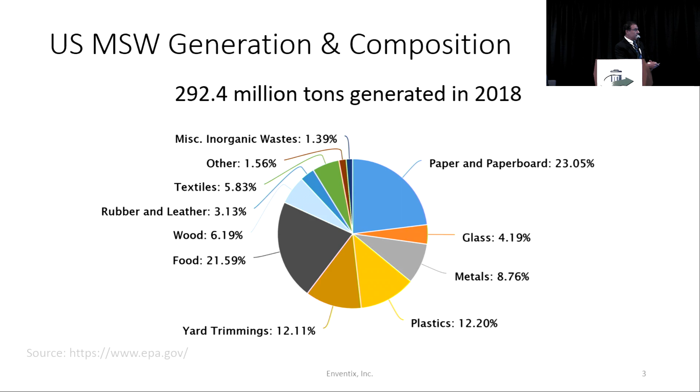In terms of paper, anyone who deals with paper recycling knows that a lot of paper is not recyclable. Dirty pizza boxes are not recyclable, all of the packaging material is not recyclable. You can't just send it to a paper plant and recycle it. So what do we do with it? And a lot of it is commingled. So how much do we send to the landfill? We send a pretty significant amount, about 50% or so, with all of the recycling, all of the organics, all of the waste-to-energy and everything - a significant amount of value is lost.

Also a significant amount of greenhouse gas emissions comes from landfill.

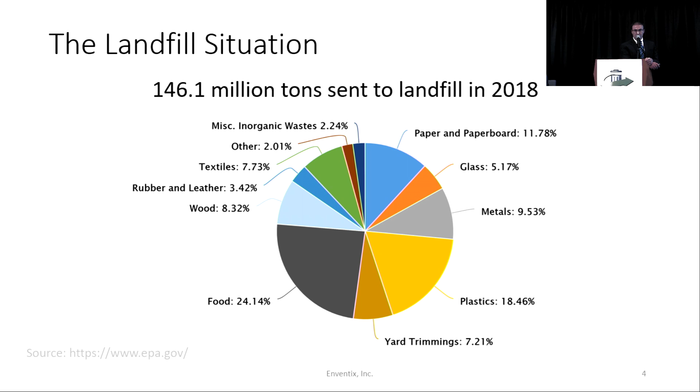Waste is not something that decreases, it increases with population, we know that. It doesn't matter what you do. So what is the solution? Landfill is business as usual in many countries, not just in the United States. Anything different requires capital investment, which in many places there's no incentive to make. Waste management companies don't like to change this type of business because, in their perspective, it doesn't always work.

We have some proliferation of MRFs, not only here in the United States, but throughout the world. There's some adoption of MRFs. But remember, dirty MRFs or single stream deal with mixed waste, municipal solid waste. It comes from a bag and has everything in it. It doesn't matter where you are—with some exceptions, maybe you can change people's habits to get them to put recyclables in the blue box, but you're always going to have to deal with the mixed bag that has everything in it.

So in order to solve that problem, we really have to use technologies which are in development, and many of the big components are already here, that will allow us to sense, segregate, and separate effectively. So we need effective separation and materials recovery.

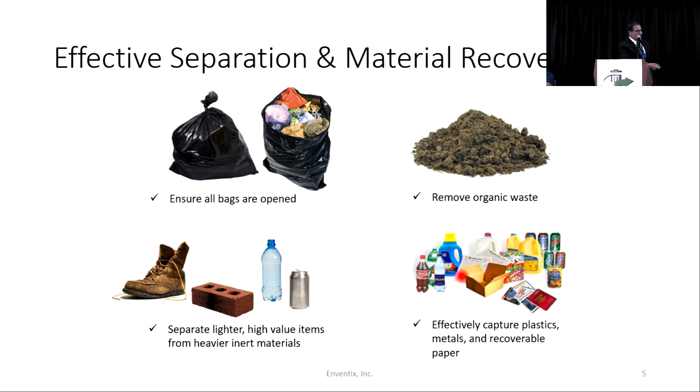All of the requirements here: we have to remove the organics, the food that comes in the bag, all of that material, and also the shoe and the brick and everything. We have to be able to do that effectively, and we have to be able to recover all of the valuable recyclables effectively and separate them.

The concept we're talking about is mostly familiar to everybody. The MRF, material recovery facility, which may be a dirty MRF or single stream, can accept waste, segregate it into recyclable materials—metals, paper, cardboard, glass, recyclable plastics—and also recover the organics. What do we do with the organics?

There are a lot of good examples now already using anaerobic digestion and composting. We can recover significant amounts of energy, as well as prevent the organics from creating greenhouse gas emissions in the landfill, and create compost, which in turn helps create soil amendments and improve overall agriculture.

And what happens after we do that? Remember, we said about 20% recyclables, 40% food and organics. If we do that effectively, we're talking about 60% recovered. Then we still have about 40% we need to take to the landfill. Every time we put waste in a truck, bring it from the source to the MRF, and then from the MRF to a landfill, that's more greenhouse gas emissions associated with it. Plus we'll be throwing value into the landfill.

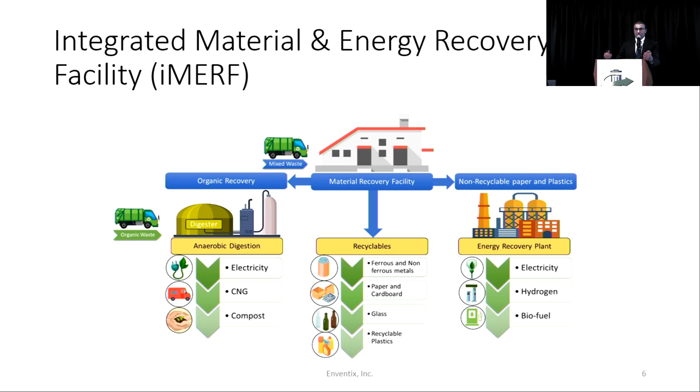it makes a lot more sense economically. Because when you integrate all of this process equipment together, the cost of operations starts to come down. The capital investment also starts to come down. The overall recovery increases. The amount of money and greenhouse gas emissions that we expend on moving waste around comes down. That's where maximum recovery starts to happen.

So what is a MRF? Not all MRFs are created equal, you know. A MRF that has 50 guys standing there moving things by hand is not a modern MRF that gives you maximum recovery. But a MRF that uses optical technologies, pneumatics, eddy current, magnetics, removing all these different types of constituents of waste effectively, including MRFs that have artificial intelligence and machine learning based equipment that can actually recover recyclable materials at a higher efficiency - that's the type of MRF we're talking about.

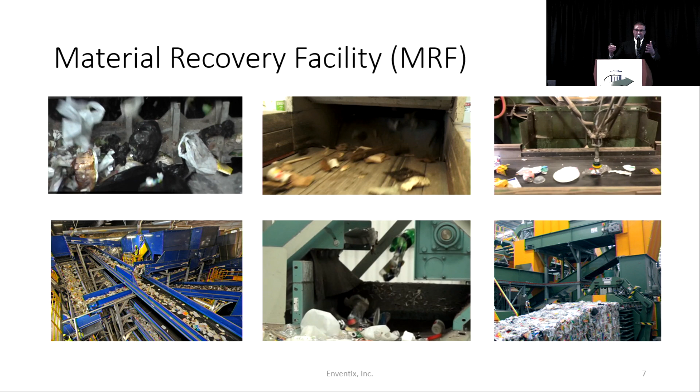When we have maximum recovery, it makes a difference in terms of economics when you're recovering 80%, even 85% and 90%. Huge difference. And you talk to a lot of executives in the waste management industry, they tell you, oh, MRFs are no good, they're just a waste of money. But that's not the attitude we should be taking towards a pretty significant and complex problem that has, as our population increases, not just in the US, and our cities increase throughout the world, a need for value recovery. Our eyes and intention should be towards improving technologies and recovery efficiency, not dismissing technologies that are in development.

So what about the organics portion? We have very good examples, already very successful examples. One of them is the largest anaerobic digestion plant, built by Zero Waste Energy Development for the city of San Jose. And it's operating very well, producing biogas, exporting power, green power, biopower, and it's also producing clean compost.

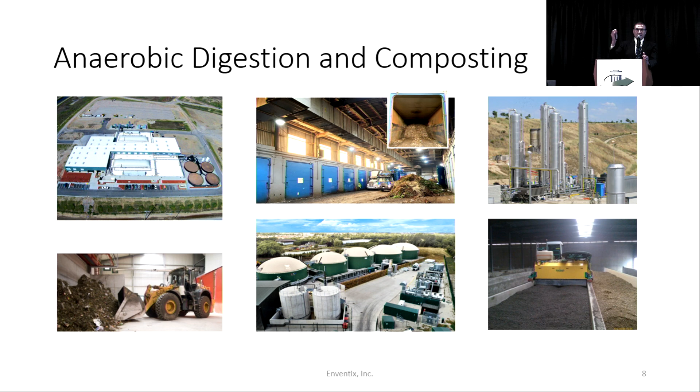There are several other examples. There's another new example also for waste management in the city of San Leandro, just commissioned or about to be commissioned. So there's a lot of examples. There are two important components of an integrated material and energy recovery facility: the MRF, and anaerobic digestion composting. Then what else do we need in order to complete the recycling loop?

We need to deal with this type of waste, okay? Because that is not organics - you can't turn it into biogas, and it's not recyclable, you can't take it to a plastic factory and turn it into plastics again. That's dirty, commingled paper and plastics, wet, dirty paper. Guess what? Our waste here in the US, and most municipal waste in the world, after you put it through a MRF, you will find that portion has about 60% paper, 40% plastics, film plastics.

What does that mean? It means it has a significant amount of biogenic carbon. It's a biomass base - you can turn it into biofuel for carbon reduction. If you take that and burn it all in an incinerator, you're just turning it into CO2, all of it, including the plastic portion. If you gasify it and try to make biofuels from it, same thing.

And you can't have effective gasification systems that work at 100 tons per day economically. That's why when you talk to people, they say, well, it doesn't work, I need a big plant - where am I going to get that waste? How many cities have thousands of tons of municipal solid waste per day? So the solution is densification, creating SRF, solid recovered fuel, from a resource that could be recovered within the MRF.

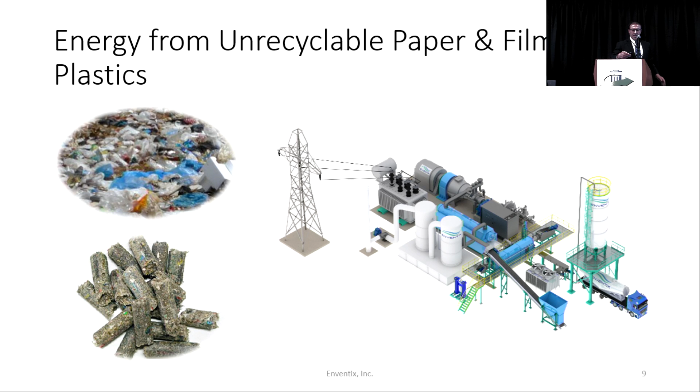How much time do I have? Almost done. So...

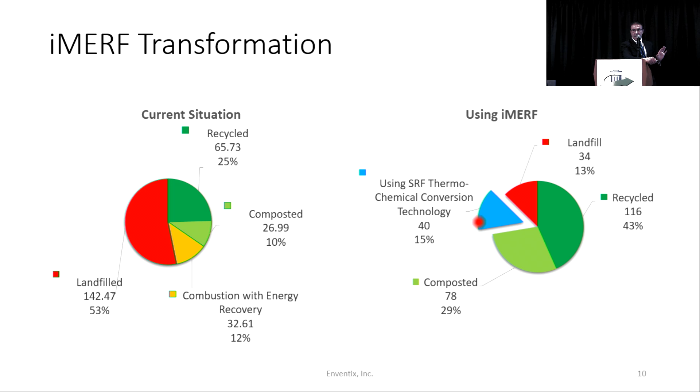But if we apply all of these technologies, we can reduce landfill from this amount to less than 13%. Again, these numbers can go up and down depending on which technologies you deploy. And the amount of energy recovered can be significantly increased, and it is bioenergy, it is biomass, because it depends on what type of technologies you use.

If you're using pyrolysis, for example, it breaks down your organics, the materials, into gases - pyrolysis gases - and liquids, and leaves a significant amount of carbon behind. That carbon, in the form of char, could be a form of sequestration for carbon that is not biogenic. That carbon could be used for materials. The lowest value for that char is if you go and blend it with asphalt.

Improve the properties of paved roads using that, or using plastics. So you're doing two things: you're creating biofuels through that process, and you're actually sequestering carbon that is not biogenic in nature.

When we do all of this, here's our situation right now, if you look at the municipal solid waste greenhouse gas emissions related to that. This is the greenhouse gas emissions related to paper that goes to a landfill. Paper is not instant - plastics degrade over a long time, but paper actually degrades much faster and produces greenhouse gas emissions.

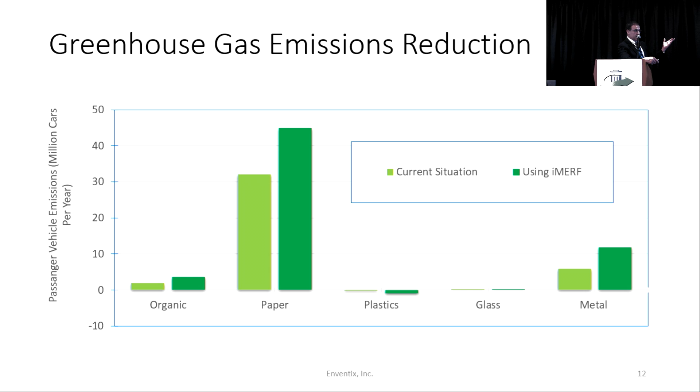So we have a significant increase in terms of reduction in greenhouse gas emissions from landfill, from waste, if we apply all of this technology. That's in the form of how many cars we remove out of the road, okay? Cars as in combustion-based cars.

So what are the challenges really in applying all of these technologies besides business as usual? The technical challenges are that the waste feedstock is really variable in composition and nature. Also, we have contaminations when we deal with thermochemical conversion and using catalysts to make biofuels from that non-recyclable portion of plastics and paper. We're dealing with contaminants like sulfur and chlorine, which are poisonous to catalysts, and they are the cause of many failures in waste-to-fuels projects.

Even in larger scale biomass, not just waste, hundreds of millions of dollars were lost because of these contamination issues. So we have to develop technologies that are more robust, that can deal with the nature of the waste.

Economics of scale limitations in conventional fuel cycles - so we have to develop technologies not for 50,000 tons per day, not for 100,000, but for 100 tons per day. This is the technology we need to develop, because it has to be developed for distributed scale, for the small city, where we can actually produce biofuels, recycle or recover, achieve maximum recovery from municipal solid waste, to reduce the amount of waste that goes to a landfill to less than 10%.

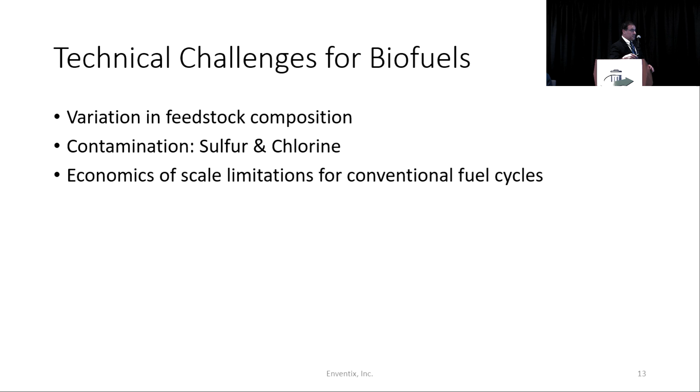One solution that we have been working with is pyrolysis. Why is pyrolysis a solution that could fit this specific problem? Because choosing which equipment you could use pyrolysis with, it fits the scales that we're talking about.

For example, this system right here that I'm showing has a pyrolysis reactor based on an indirectly heated auger reactor. This could process about 100 tons per day. Without having to convert to biofuels, just conversion directly from pyrolysis gas, hot pyrolysis gas, directly into a boiler and a steam turbine, you can generate electric power.

Bio-based electric power, without having to use catalyst, without having to use complicated technologies. A pretty straightforward combustion system that could produce bioenergy with the highest levels of emission standards.

The problem with bio-based gas that has a feedstock containing nitrogen is that it's going to produce NOx. But the solutions for that are available off the shelf. You can have scrubbers and other equipment that will fit this scale at a high economic value, so you can produce 5 megawatts of electric power at a distributed scale that makes a huge difference in terms of local communities.

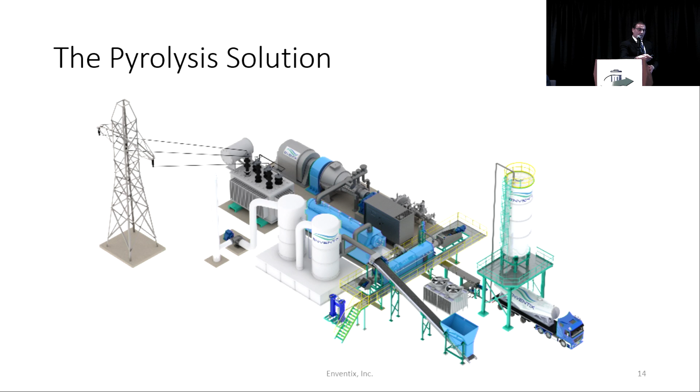Especially communities that have bioenergy-based generation incentives. I don't have a lot of time to talk about this, but this is just an overall mass material balance for a typical 1,000 ton per day integrated material and energy recovery facility. If you do it right, you design your MRF with maximum recovery.

If you have anaerobic digestion and composting, and thermochemical conversion using pyrolysis, you can achieve maximum recovery, either through existing technologies of electric power generation like I talked about, or for advanced catalyst type biofuel cycles where you could produce maybe sustainable jet fuel or diesel using a more robust catalyst. Thank you.

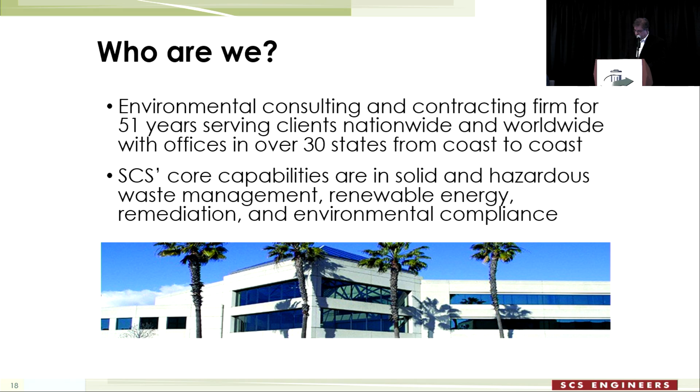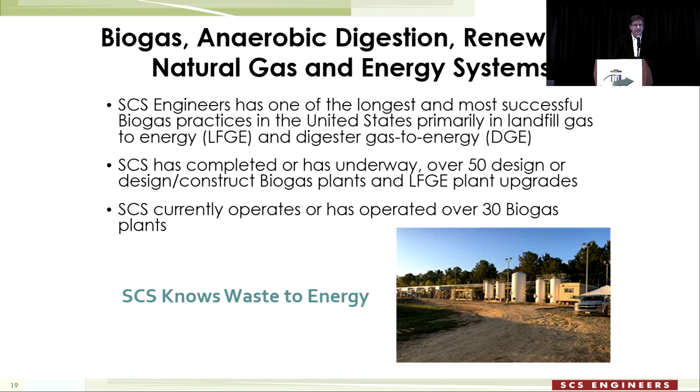SCS Engineers has one of the longest and most successful biogas practices in the United States, primarily in landfill gas to energy. We have either completed or have underway over 50 biogas design-construct plants and landfill gas to energy projects, and we currently operate or have operated over 30 biogas plants. So I'll say it flat out: SCS knows waste to energy. We know a little bit about that. More locally, there was a Central Valley dairy digester gas to renewable energy project. We have more than 4,000 landfill gas and leachate projects going. I'm not an expert on either landfill gas or biodigester gas — if you want to know more, talk to Pat Sullivan here on the West Coast or Bob Eisenberg on the East Coast, or find them at scsengineers.com.

Now let's get on to the topic. Sorry, rushed through that, now I'm going the wrong way. All right, oh, I did want to say one more little thing — is there a pointer? Yeah, look at there. SCS was rated by Engineering News-Record as the #1 solid waste consulting firm in the U.S. So we know a little bit about this stuff, I just wanted to point that out to you.

Now, on to the topic. We are — if I can get this to where I can use it — honestly, the most time I spend in front of people is when I'm lead singer in a rock and roll band. So if you don't mind, I'd really rather sing this to you than say it. Is that okay with everybody? I'm just kidding, I don't have my band with me.

We are in a renewable energy boom. We have seen a tremendous increase — 90% of the growth in the energy sector in 2020 was renewables, wind and solar. At times, when the sun and the wind align, we can produce more energy than we can consume through renewables. It's a tremendous thing: California can produce more energy than it can consume in renewables when the sun is shining and the wind is blowing. We can generate as much energy as the sources we're replacing. We're shutting down fossil fuel plants, we're shutting down nuclear plants, and it's a good thing — we should be looking to renewable energy sources, right? There's just one catch.

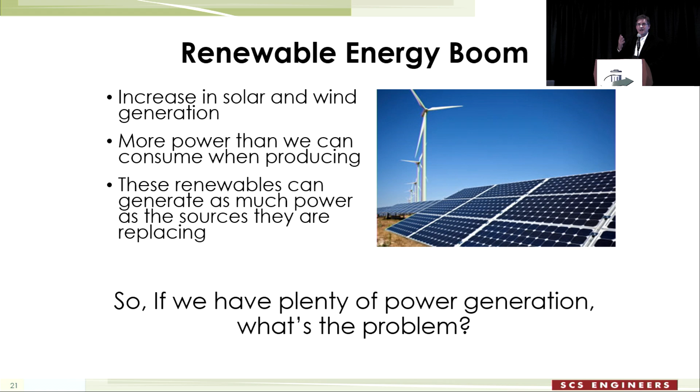In the middle of the day, we can outproduce the nuclear power plants with solar energy and wind because everything's kicking. But we have an aging power infrastructure. It's not capable, it was designed many years ago. Most of the power transmission lines we have are more than 40 years old. We have an aging grid, and it's incapable of handling the amount of energy we want to put into it.

As a matter of fact, we've got states, New Jersey for instance, where the waiting list is several years now to put renewable power resources on the grid. So as good a solution as that seems to be, we might kill a few birds or generate some noise we don't like. And with the photovoltaic cells and wind turbines, we're also creating waste we're not sure how to dispose of properly, but we won't talk about that part of the problem. We are generating a lot of clean energy.

What's another problem with solar and wind? I've got a point up there, but you have power when the sun is shining, you have power when the wind is blowing. But what happens when you get into the doldrums and you need lots of power?

What's one of the big California power producers? I'm not a power guy, so... there you go, PG&E, okay. Good old PG&E's nuclear plant went down years ago, took it offline, didn't need it anymore. So we don't have that big battery, we'll call it, that used to supply the grid. It's not there anymore.

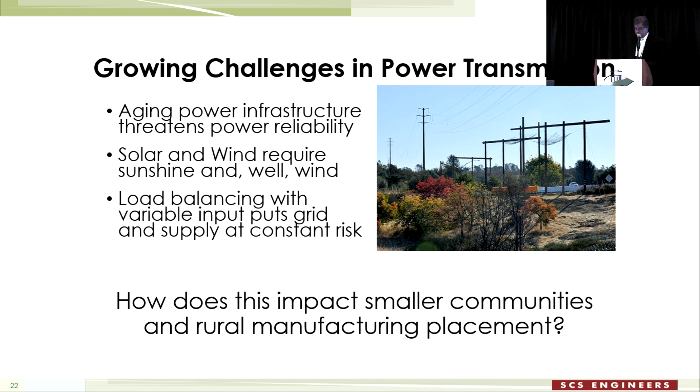So we've got a lot of power. Now, one of these days we're going to find a way to store all that, right? But for the time being, we have about $2 trillion worth of expenses we need to bring our grid up to speed to be able to handle the variable inputs. And that just hasn't been spent. I will say, to balance that out, we're going to spend that money anyway, just replacing what's deteriorating. Why not have a forward-looking plan? But that's not what I'm here to talk about.

You need power when you need it. When power demand peaks, supply is waning. 5 o'clock in the afternoon, the heat loading of the day comes in on you, air conditioners kick in, or 5 o'clock in the afternoon, sun's going down. You live in the Northwest, or North Dakota, Montana, whatever. Sun's going down, you need to kick in the heat, and the power supply is waning. There's not much solar. Maybe the wind's kicking up, but it's very cold out.

You need power when you need power. Manufacturing especially requires constant, reliable, resilient power. And unfortunately, until we have a way to store all that energy we can create with solar and wind, manufacturing can't rely on that energy day in, day out to continue to create. That's why, because of our aging grid and infrastructure, we don't see manufacturing investments in some areas like Chicago. You've got communities missing out on opportunities because we don't have reliable power supply. We don't have the infrastructure to support it. They're going where it is, or where it will be, maybe to the Sun Belt.

Eventually, we'll solve the storage problem. We've got hot salt solutions, we've got maybe battery storage, that'll get better. Maybe we learn how to pump water up a hill and let it come back down again, I don't know. Maybe we learn to extract more clean gases like hydrogen. Maybe we finally crack the fusion problem and we get all our energy from little suns all over the world. But until then...

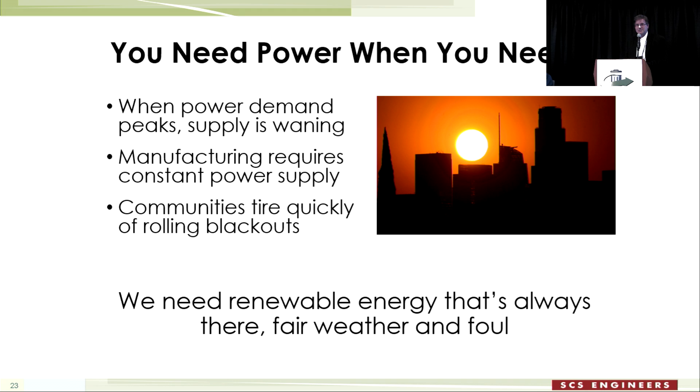Dr. Alyaser has pointed out a huge problem: we're putting all kinds of waste in the landfill that have other great uses. For instance, we can pyrolyze it and turn it into fuels and raw materials.

Another solution is to take some of this waste before it goes to the landfill, directly from the industry that's manufacturing it, and place this Green Worldwide Technology in that industry. Green Worldwide Technology provides a turnkey ready system.

Basically, we slide it in on a pallet, ready to go depending on the needs and the fuel. It's efficient, right there locally, providing power to the manufacturer. They use their waste, chopped up a little bit to make it work. I'll explain the system in a minute. It's able to provide combined heat and power, so it's very effective.

You've got power and steam, or power, steam, and hot water as you need it. It's environmentally responsible—we're keeping waste out of the landfill, especially waste that's problematic. We'll talk about that in a minute.

It's scalable. We have systems that we can develop from anywhere from 2 to 8 megawatts. That's enough to power manufacturing, and that's enough to power communities.

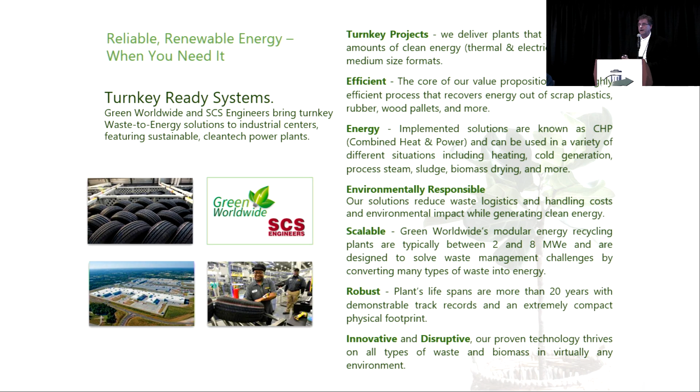It's innovative and disruptive. We can take all kinds of biomass and make usable energy with it, for instance municipal solid waste.

I'm not big on using municipal solid waste because I don't think that's where the heartbeat of this is. The heartbeat of this is using waste from the industry that generates it, in the industry that generates it, reducing tipping fees.

It's a niche solution, but it's a niche solution that can be good for industry, and it can be good for those neglected communities—the communities that can no longer survive without industry.

Could be used tires, difficult to recycle or reuse plastics or textiles, auto fluff, used oils. We had one industry that we're still in negotiations with who has a pallet infestation.

Are you guys familiar with the pallet infestation problem? What do you do with tons and tons of pallets that nobody wants? Well, you stack them up in the back parking lot, right? And they just sit there and rot.

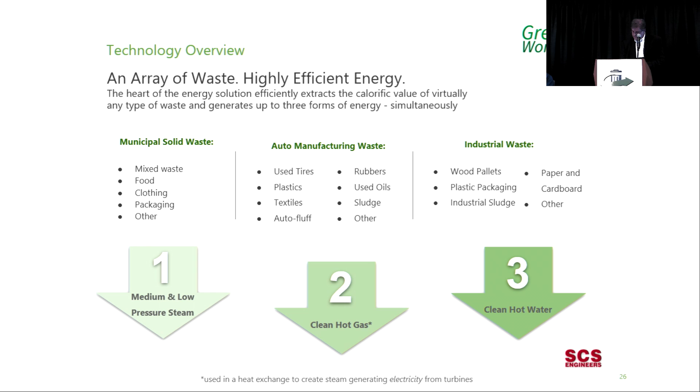A quick overview of the technology. I'll show you some pictures of the actual technology. We use the old proven concepts of time, turbulence, and temperature.

It's a high energy vortex that keeps the materials fed to it recycling. It can handle gases, solids, and liquids. These materials are cycling with each other as the materials oxidize.

They transfer remaining heat to incoming materials. Nothing leaves until it's thoroughly burned, thoroughly oxidized. We use the waste heat from that to heat water or to turn a turbine.

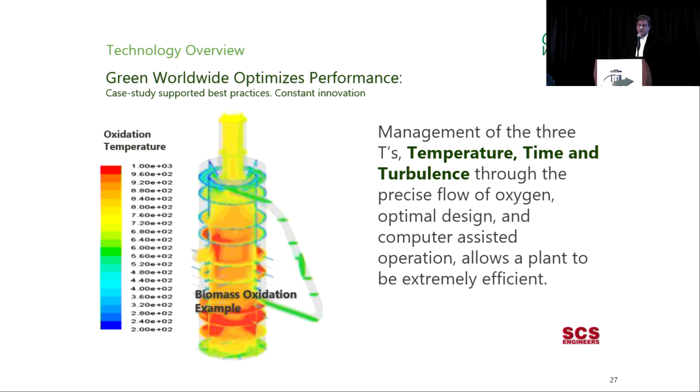One of the beautiful things about it is the isotherm across the entire range of the system, the combustion vortex—or I should say it is an isotherm. It stays right at that 1100 to 1200°C mark.

Just another instance: it has low thermal inertia. It also has essentially no moving parts, other than the blowers that keep it going.

So you've got a system that you can bring up to full temperature in less than 30 minutes, depending on the fuel you're burning, and you can bring it back down to where you could work on it in 30 minutes. It's all stainless steel, no moving parts, high efficiency combustion.

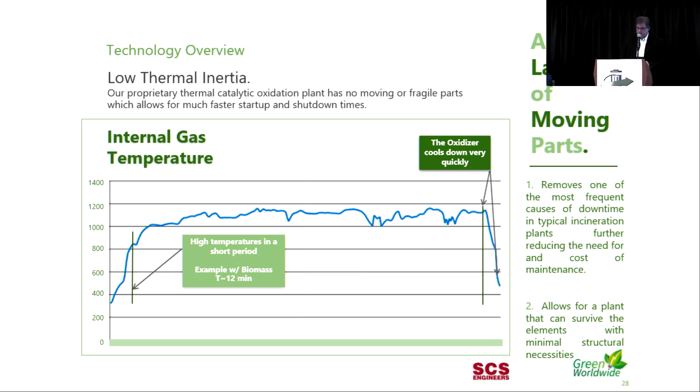So you can generate a lot of heat from that at temperatures well below where you're producing a lot of NOx. I'm not going to start geeking out and talking about air pollution, because that's an area of my specialty. How are we doing on time?

Okay, just a quick overview of the layout. And this is... sorry about that.

This is designed to sort of allow maybe different kinds of waste collection facilities. But again, primarily what we're looking for is industry that can use the waste they're generating within the scope of what they're doing. So you'd have a reception area, a shredding area. We've got to get these solids down to about a 2-inch diameter, give or take, 2-inch grid size. Then you've got the thermal processing, and then you've got energy generation.

Granted, what you're burning, what you're oxidizing, what we call thermal catalytically oxidizing, may produce some gases depending on what you're doing. Tires is one of those things that takes a little bit more treatment, where you're going to have to do something with the gaseous emissions. We can handle that with scrubbers and baghouses, the typical air pollution solutions. Very clean overall burning, though.

And finally, you've got that energy generation you're looking for. Again, 2 to 8 megawatts, depending on the need, depending on the fuel. Somewhere around 30 tons an hour capability.

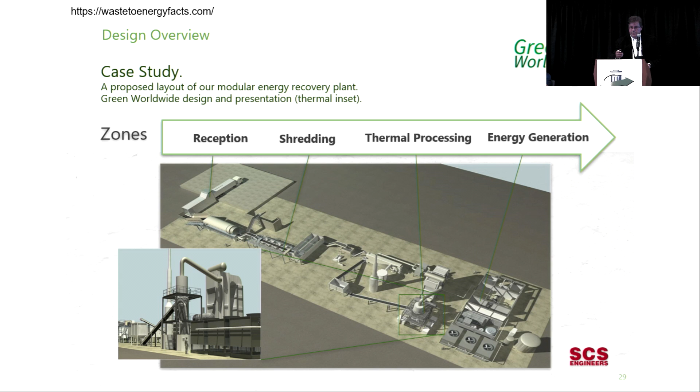And we're not moving. Where's the laptop? Now we're moving. All right.

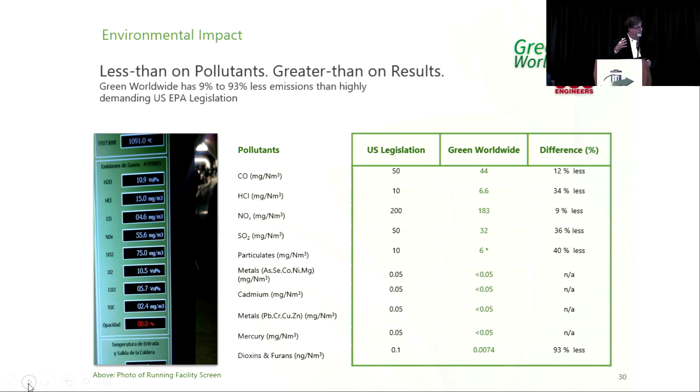Real quick, again, I don't want to geek out. I'm an air guy, so the first thing I wanted to do is compare tested emissions from these systems that we have set up in Japan, in Spain, in Mexico, and India. Emission testing that we've reviewed against U.S. standards currently, either the air pollution CISWI standards or other applicable standards, and found that we're able to meet or surpass all those standards.

Just a similar slide. So we can handle waste from industrial complexes, municipalities, local governments, the food industry, oil industry, hotels and buildings, chemical industry. All these things that would be going to a landfill would be charged tipping fees, would have transportation costs to the landfill. Now you're taking that, using it as energy in a very efficient system to generate power, to make the grid more resilient, to bring life back to communities that are dying because they're at the end of the grid, because manufacturers aren't interested in those areas anymore, partly because of that.

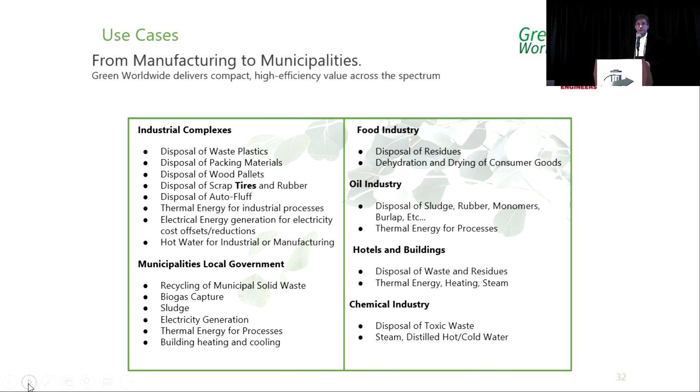And finally, you've got state-of-the-art components. The whole system would fit into something about a quarter the size of this room, except for maybe the air pollution control stuff. But we're talking about a very, very clean, very efficient system.

It's not pyrolysis. It's not pyrolysis. We're not creating a burnable gas. We're not creating a gas that makes raw materials. We're trying to be very efficient with this for those niche places, niche industries, niche areas that just need to be able to create reliable power with existing waste in a way that makes sense.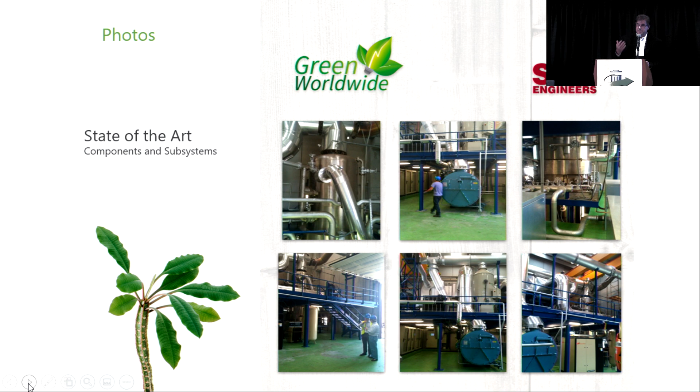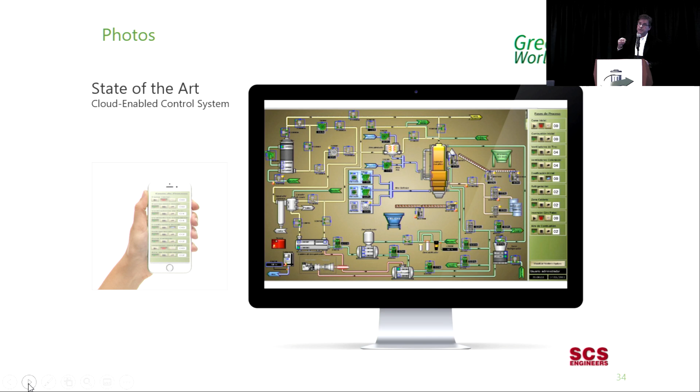And we've got state-of-the-art controls on it. We can control airflow, we can control speed of rotation, we can control dwell time so that we can ensure we're getting the maximum efficiency with the lowest combustion emissions.

And we really do believe this system is just one more step in helping to reduce waste going to landfills, helping to find a way to look at that waste not as a waste, but as a raw material or a resource, looking to find a way to revitalize and sustain the grid until we can upgrade it to the point that these communities that have been long overlooked can be looked at again by manufacturing. This is a solution that gives them an opportunity to be able to do that.

So that's what I have for you. Do we have any questions? Okay, we have a question.

Hello, it's actually two questions. One, does your technology produce char? And the second one, if the locations put in this technology, do they need a solid waste permit?

Okay, that's a good question. One, no, it does not produce char. It does produce ash, though. You are burning things that have unburnable things in them. So we will produce ash, but not char.

They used to screen it out and it was clean. They use the same screen they were using years ago, and now it's not even usable. They can't send it anywhere, and they're down to sending it to the landfill.

So what we ended up developing is kind of an attachment to an existing facility to scoop out more organics than they're able to do right now.

Basically, we're using our pulverizer as the core of the system to capture the previously discarded dirty organics. Most mixed waste facilities in the U.S. right now make a first cut with trommel material, hoping that all the organics will come out in the small material fraction, zero to 2.5, zero to 3 inch.

They attempt to screen clean organics with a 3/8 cut, but they end up with a pot of material that's a mix of organics, plastics, film, foil, and glass that they can't do anything else with than send to the landfill, because it's not usable — it has high moisture content.

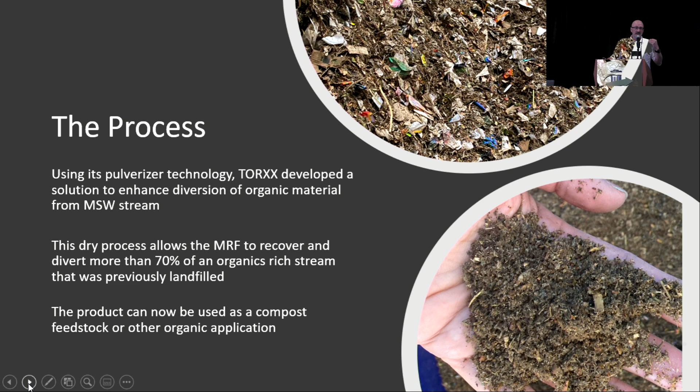So it's become more and more a big chunk of their volume. By processing that material through the pulverizer, what we're able to do is condition the material in a way that we can separate the organics from the non-organic material.

Basically, what happens in the machine is the ductile material won't size-reduce because it's too soft. We're not cutting the material, we're not hammering the material — we're using aerodynamics to create a cyclone that creates matter-against-matter contact. So everything that is brittle will shatter, and everything that is soft, like a piece of foil or plastic film, will just be released through the discharge of the machine intact.

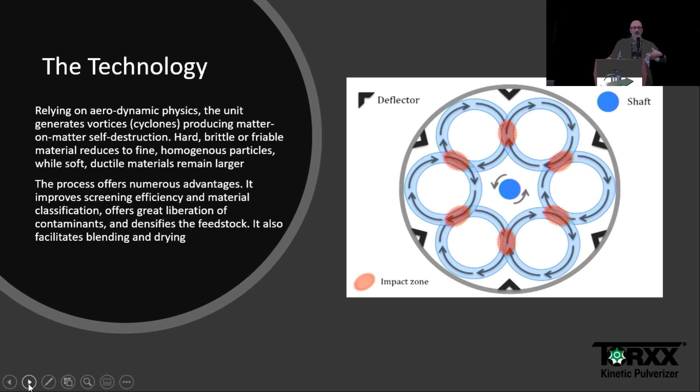Once you get to that point, you just come and screen both fractions — we're just screening what's being processed. Here's a video that will illustrate what I just said. It's a tag-on to an existing MRF, and it shows the process I just described.

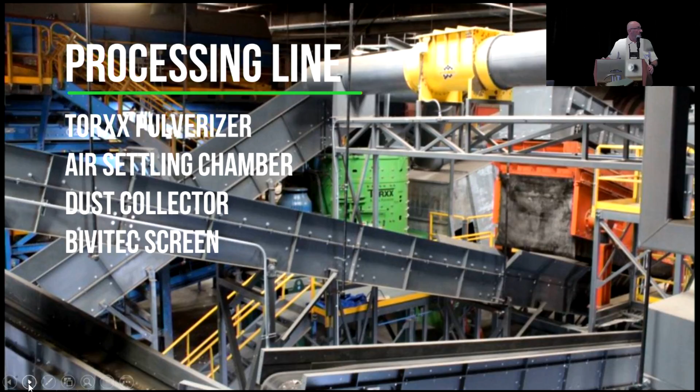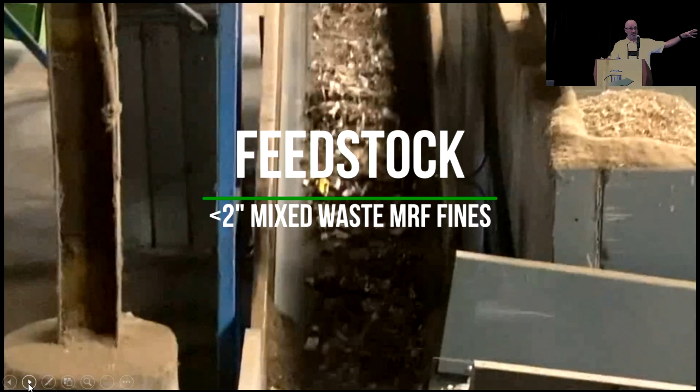Basically, we have the TORXX itself, a settling chamber, and a dust collector to control the dust the process will create. That's your feedstock, which was typically sent straight to landfill — that material could be up to 15 to 20% of their inbound volume because it's heavy and damp.

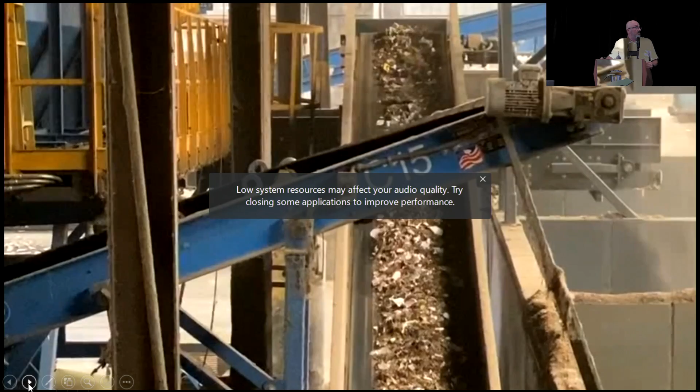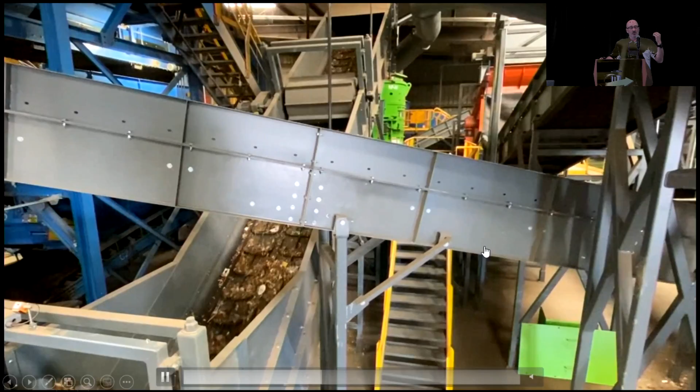So we feed the material to the TORXX itself to condition it, so it will liberate the organics, size reduce the organics, and shatter the glass to sand or silt, so it will no longer be a contamination.

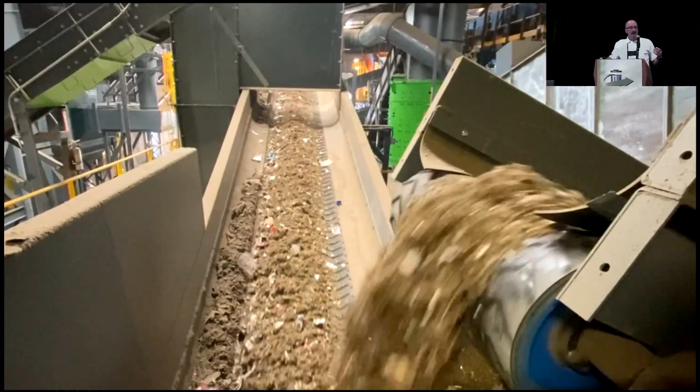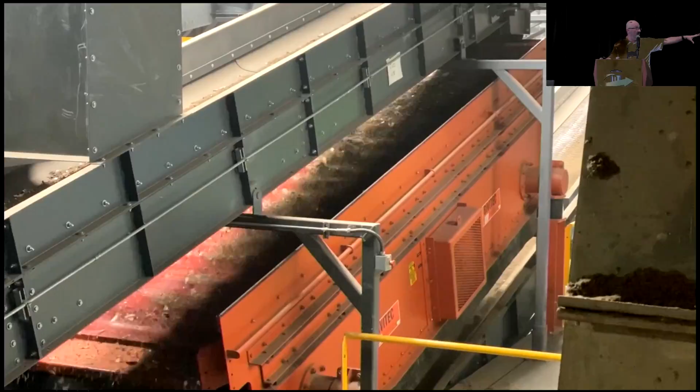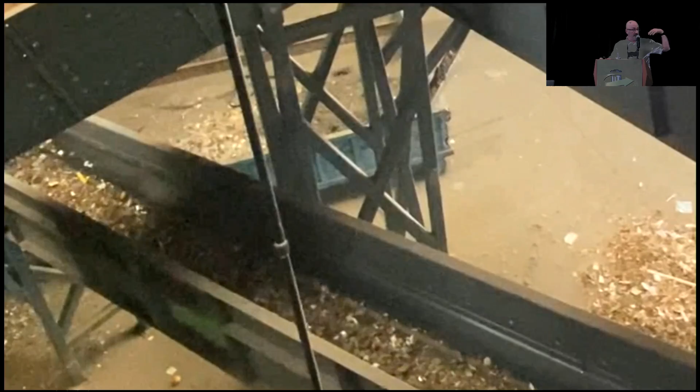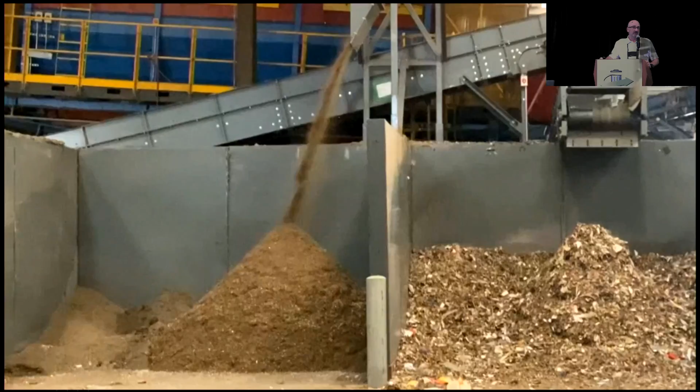While what goes through the screen, it's compost compatible material. It can be mixed with compost, sent straight to a composter, used for land application, can be used for multiple purposes.

So that addresses, for all those facilities, the new regulation - by 2023, in California, we have to cut at least 50% of the organic disposal at the landfill. That's a big problem for all the operators because if they don't do anything, they won't achieve that. So that's an option to let them achieve that.

So you can see what the material was before, which is not usable, and what it's like after.

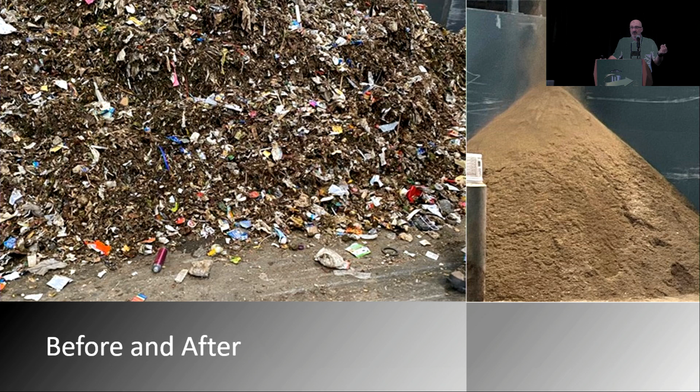To tag along with the previous speakers - it's all a matter of transport, but if you're in a zone where you have an RDF or SRF facility, the overs from that process are perfect for SRF. That stuff can be blended with any RDF material, and it has a high calorific value because it's plastic film, plastic paper, diapers - stuff that has good value for RDF.

The machine itself, we tested it and had applications in numerous other things, whether it's for gypsum, shingles, or MRF fines - typical MRF fines with high glass content - to create sandblast media, for instance, using glass coming from MRF.

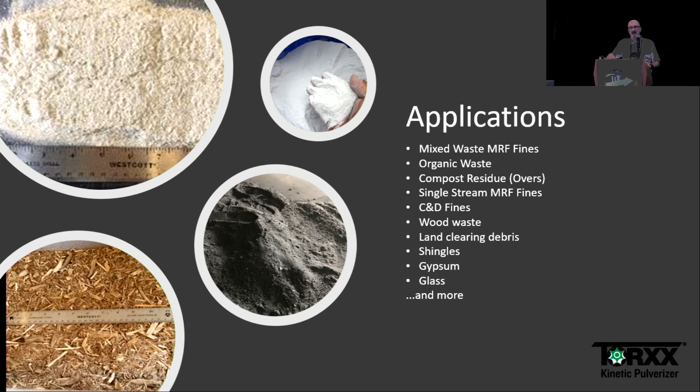But we'll be here. We'll be here today, tomorrow, and Wednesday. My colleague Terry Ward is with me. If you have any more questions about either the organic process or the machine itself, just come see us. Thank you.